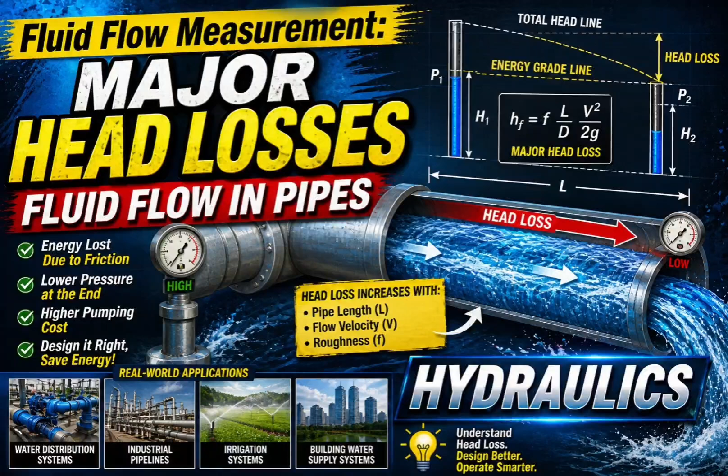Okay, so for today we're going to talk about head losses in pipe flow. Head losses may be classified into two: the major head losses, which are caused by pipe friction along straight sections of the pipe of uniform diameter and uniform roughness, and the minor head loss, which is caused by changes in velocity or direction of flow and are commonly expressed in terms of kinetic energy.

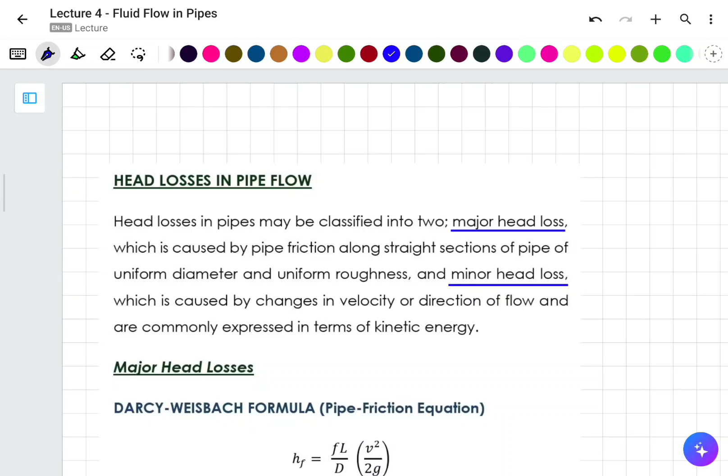So let's start by discussing major head losses. We have different formulas or ways to calculate the major head losses. First, we have the Darcy-Weisbach formula, commonly known as the pipe friction equation. What you see here are three formulas, but the first one is the general formula, the general equation for the pipe friction equation.

If the section of the pipe is circular in nature, we substitute the v squared over 2g with this equation, which is why we have 8Q squared over pi squared gD to the fourth. This equation, which I'll box in purple, is the equation for circular pipes.

And the simplified equation for that is this one: 0.0826 FLQ squared over D raised to 5. But again, we have to consider other pipe sections. That's why the formula boxed in red is the general equation for the Darcy-Weisbach formula.

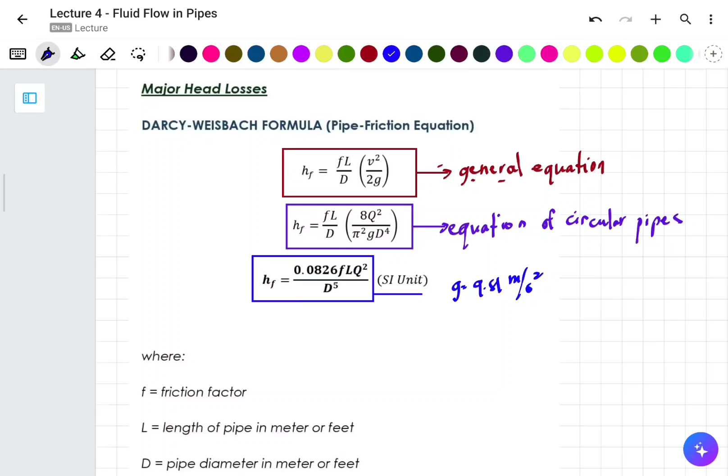So the equation expressed as 0.0826 FLQ squared over D raised to 5 is for SI units, because the G used here is 9.81 meters per second squared. That's why it's in SI. So you are expecting values of L, the length of the pipe, in meters, Q the discharge in cubic meters per second, and D the diameter of the pipe.

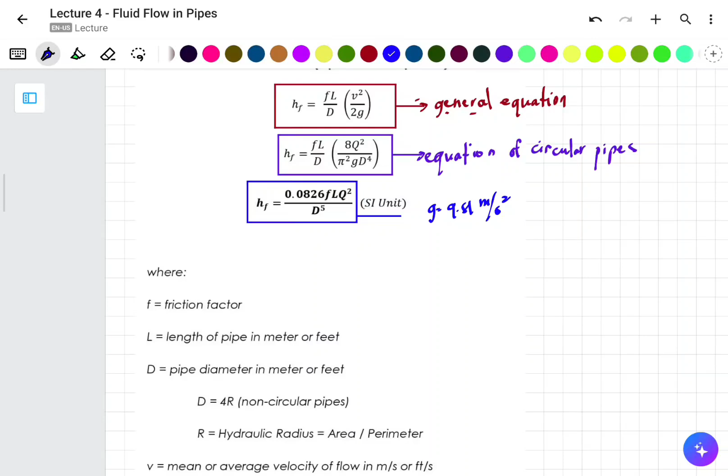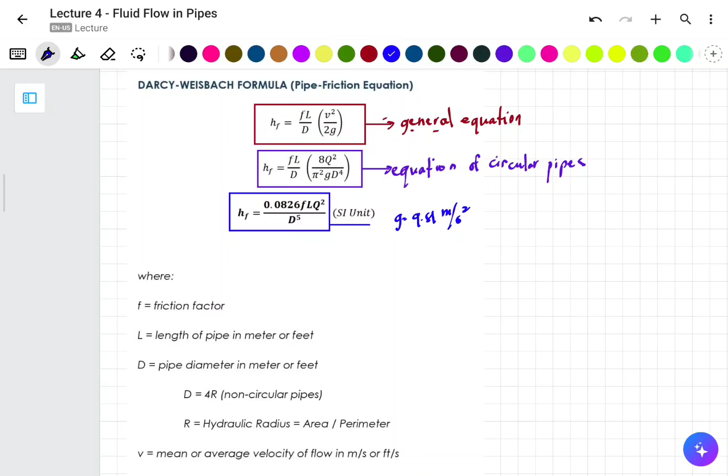Now if the pipe section is not circular, you will use D equals 4R. Again you go back to the general equation of the pipe friction equation, where V is the mean average velocity. If SI unit, we use meters per second, or other units in conjunction with velocity. And Q is the discharge. So this is for the first formula involving friction.

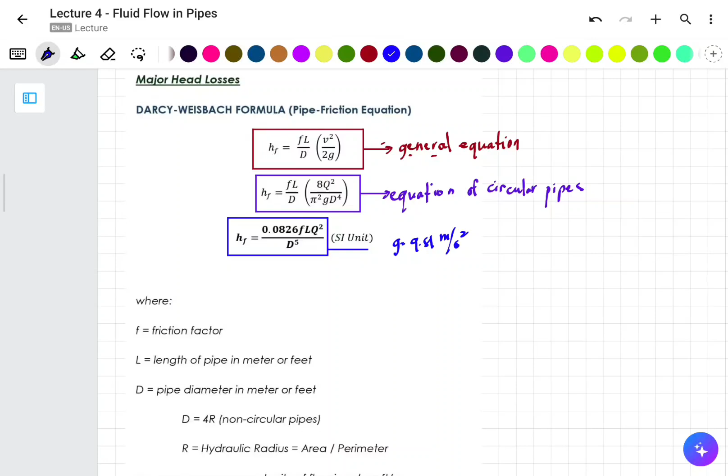Now the value of friction varies depending on the type of flow. If you still remember, we have laminar flow and turbulent flow. So we consider different types of flow, and therefore we could have different values of F, or friction.

So, coefficient of friction: in laminar flow, F is calculated using this formula, that is 64 over Re, or 64 over Reynolds number. If we use the Reynolds number value, if you still remember, Reynolds number is VD rho over mu. So if we use that, since Reynolds number is in the denominator, we interchange the numerator and denominator, and that's the formula that comes out.

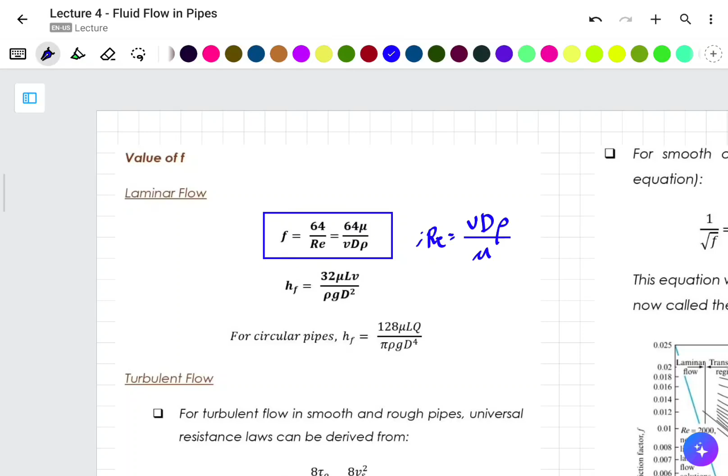Now if we use the formula for HF, the head loss for Darcy-Weisbach, let's go back to this: FL over D, V squared over 2G. So if we substitute our F, it becomes like this. Now the 32 comes out — this is our general formula. Actually these two formulas are general formulas.

However, of course, if your section is not circular, the D will change, but this is the simplified form using the formula of Darcy-Weisbach, that is FL over D multiplied by V squared over 2G. That's how we get the formula 32 mu LV over rho GD squared.

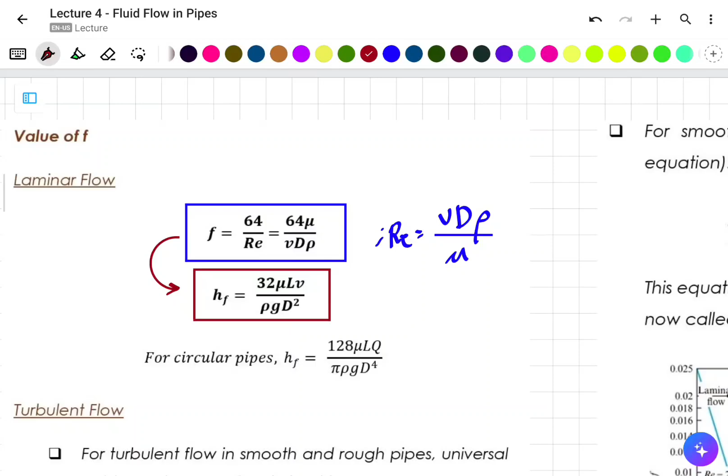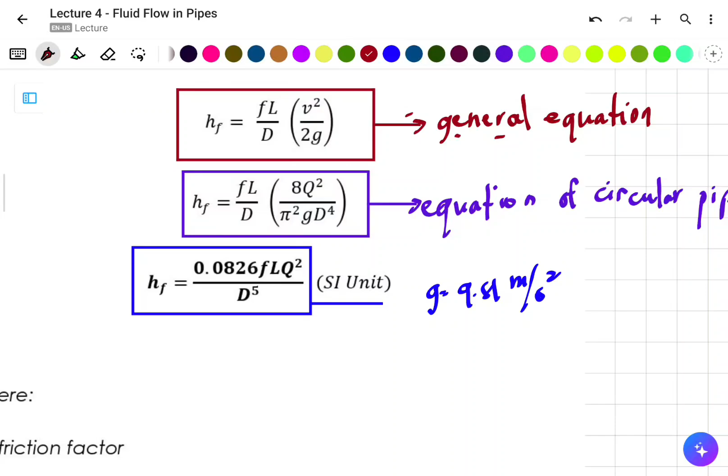Now if our pipe section is circular, that's the F that comes out. So we reduce the values for the circular section, which has the 8, this formula with 8Q squared over pi squared GD to the fourth. So we substitute F there, and that formula becomes this one. Again, this formula only applies when the pipe section is circular. You can go directly there.

128 mu L Q over pi rho g D to the fourth. If you want to simplify further for SI units, use g as 9.81 meters per second squared. If not, that's the general formula for the circular section.

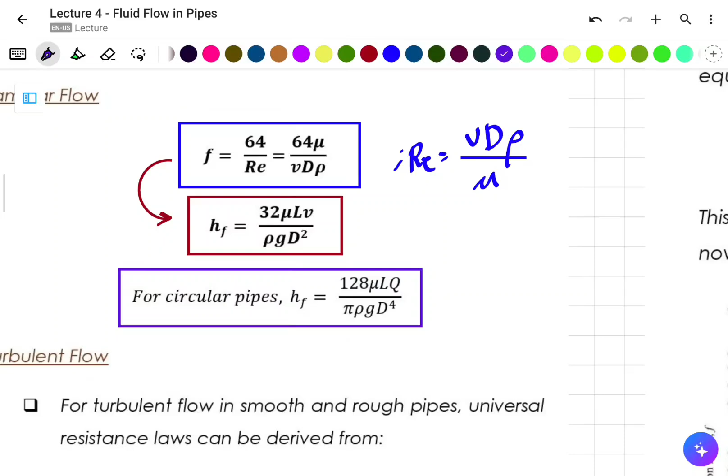Again, circular section only. The two boxed equations above, blue and red, are the two major or general equations for laminar flow for the value of F, or friction factor.

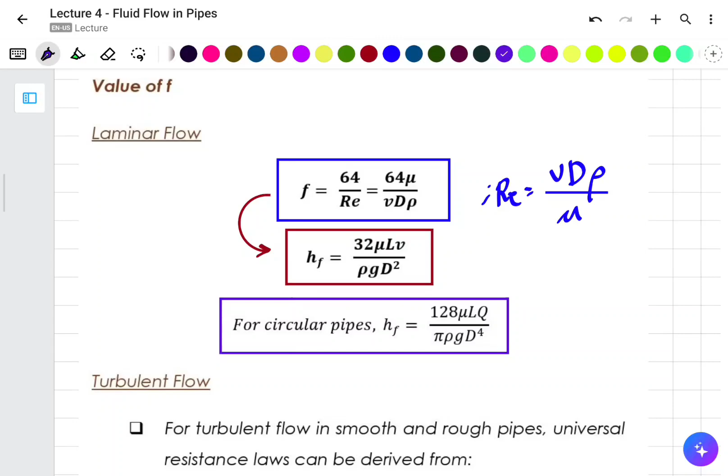Now for turbulent flow, we have different formulas depending on the application of your pipe. First, we have the case when the pipe is smooth or the flow is in smooth and rough pipes. The universal resistance laws can be derived from this formula.

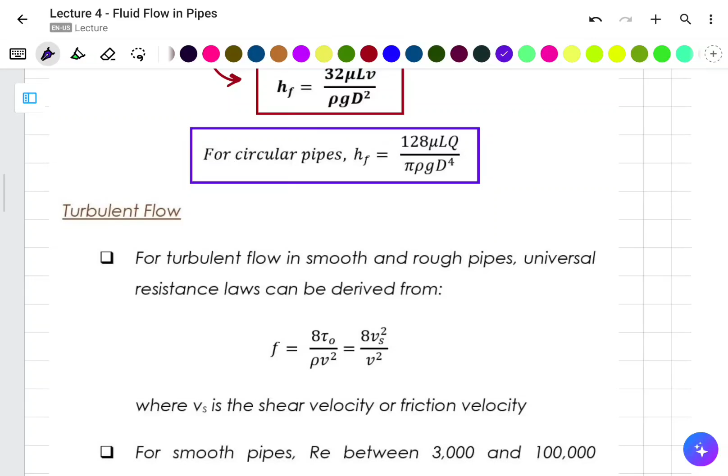So this is 8 tau sub O over rho V squared, or that's the shear, the shear velocity. That is 8 V sub S squared over V squared, or the mean velocity, where V sub S is the shear velocity or friction velocity, which is the square root of tau sub O over rho.

For smooth pipes with Reynolds number between 3,000 to 100,000, proposed by Blasius, the friction factor for turbulent flow is 0.316 over R sub E, Reynolds number, raised to 0.25.

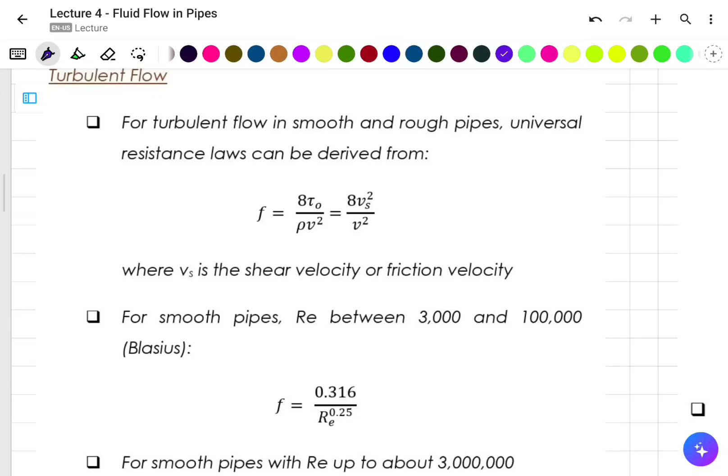Now if we have smooth pipes with Reynolds number higher than 100,000, even up to 3 million, definitely turbulent flow, that is 1 over square root of F is equal to 2 logarithm of R sub E square root of F minus 0.8.

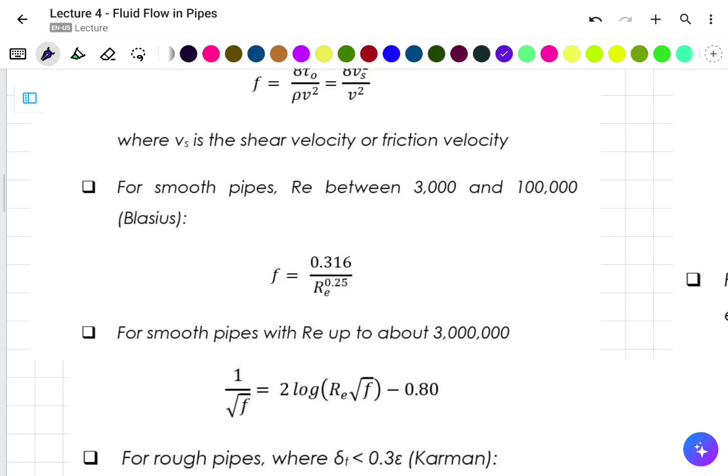Now there's another classification. If your delta sub T is less than or equal to 0.3 epsilon.

That is, the formula 1 over square root of F is equal to 2 logarithm of D over epsilon plus 1.14, where delta T is 11.6 nu over V sub S, the shear velocity. So that's our equation for rough pipes.

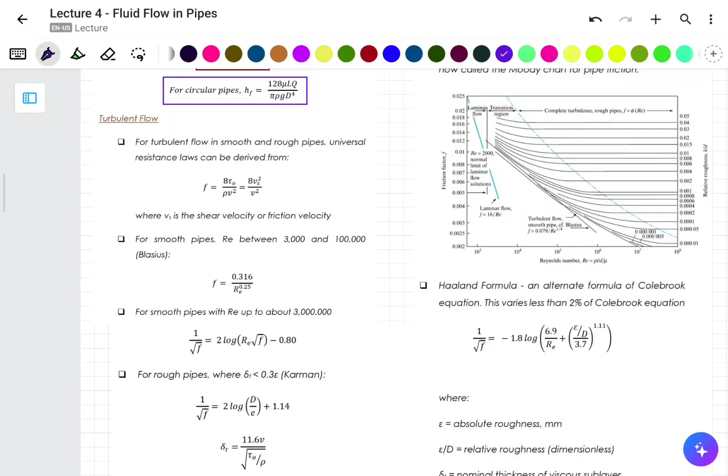Or for pipes where the delta T is lower, that's where epsilon is given, also called roughness, or absolute roughness. This epsilon is called absolute roughness.

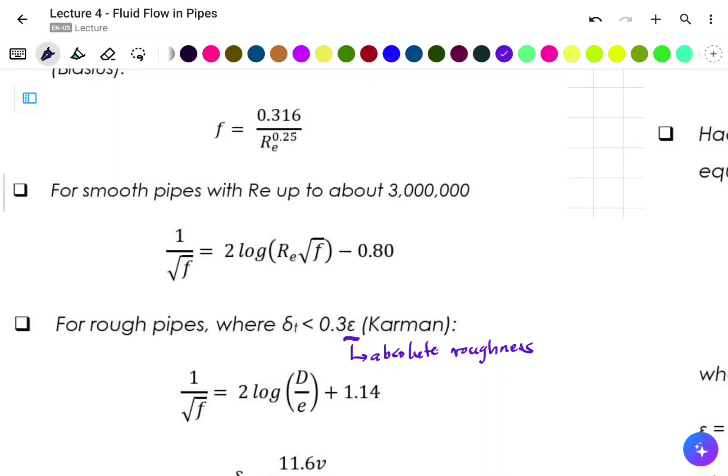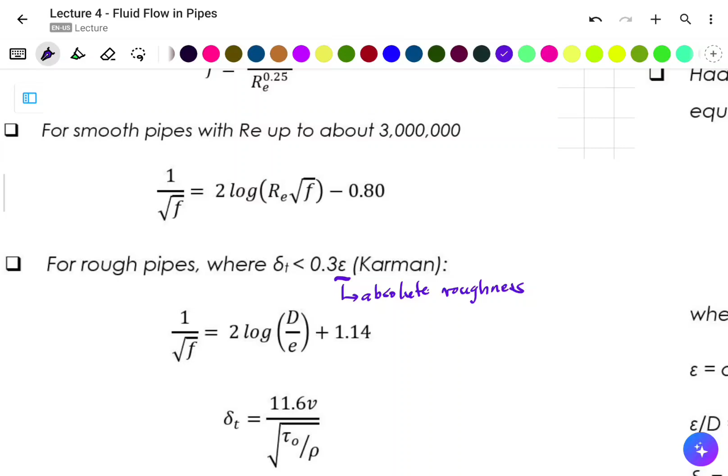Next we also have the Colebrook equation, which is for smooth and rough pipes with turbulent flow. 1 over square root of F is equal to negative 2 logarithm of epsilon over D over 3.7 plus 2.51 over R sub E square root of F.

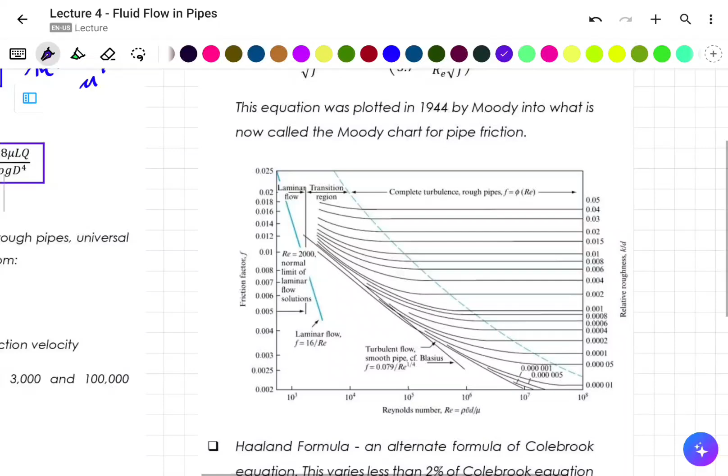Here we see the Moody chart. We can see the transition region, if you still remember transition flow. Then it's laminar flow, then it becomes turbulent, your equation becomes turbulent.

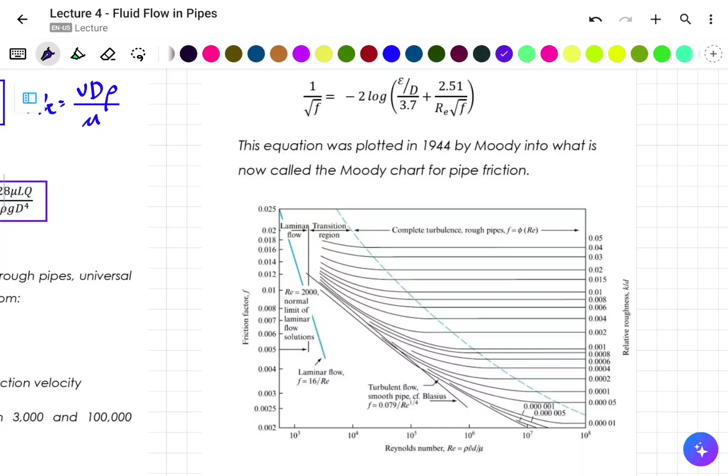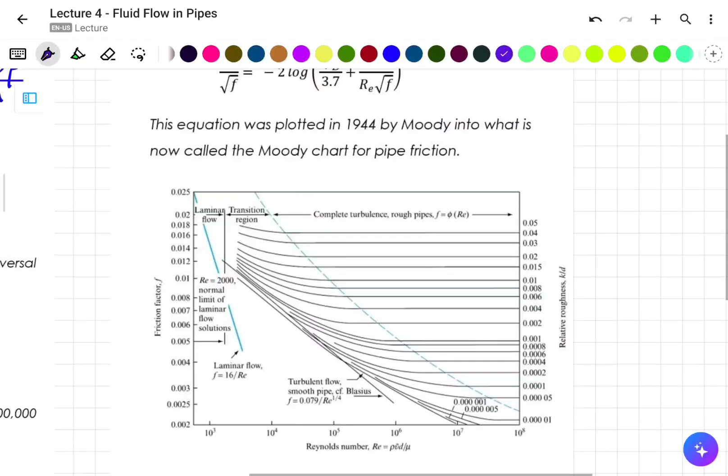This was plotted by Moody. This equation by Colebrook was plotted by Moody. But again, these values are in logarithmic scale, so we can actually compute it, but the solution becomes iterative since the value is logarithmic.

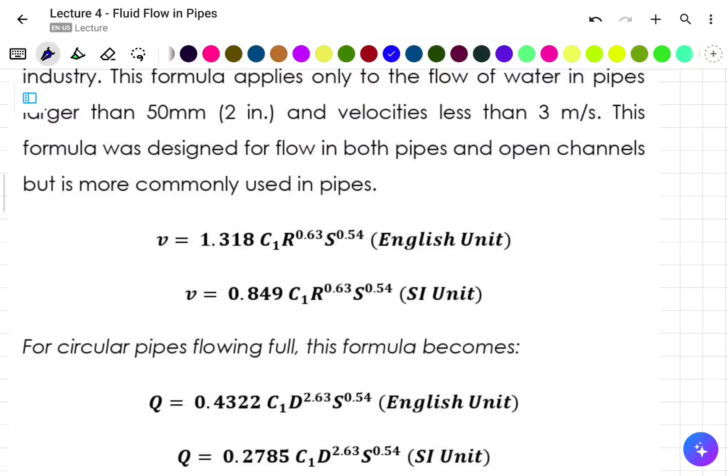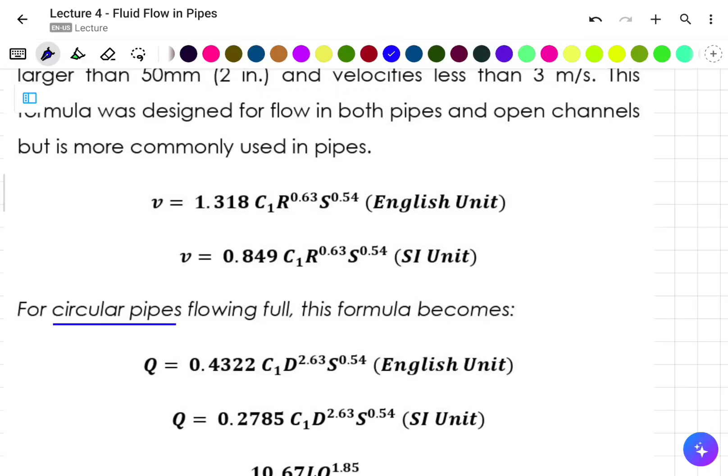So, we're given the Hazen-Williams coefficient. You have to observe also that it needs to meet the requirements of having a larger diameter, which is larger than 50 mm, and slower velocity. Usually around 0 point something. That's the velocity because the pipe is already too large.

So, here are the formulas. When it's Hazen-Williams, there's C sub 1, which is the coefficient. When our discharge is in English units, it's this one, and this is our discharge in SI. Given is the Hazen-Williams coefficient, diameter, and S, which is what we call the slope of the energy grade line, which is H sub F over L, or slope of the EGL.

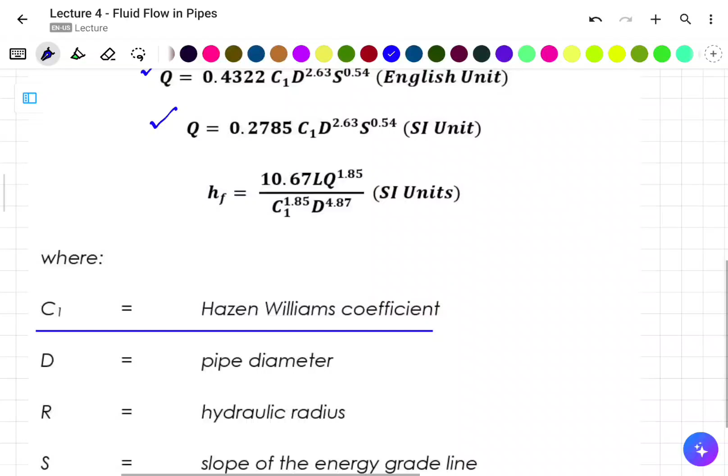10.67 LQ raised to 1.85 over C sub 1 raised to 1.85, D raised to 4.87. So it looks similar to Manning's, right? They look alike, just the variables differ. It's similar to Manning's, it depends on the classification of pipes.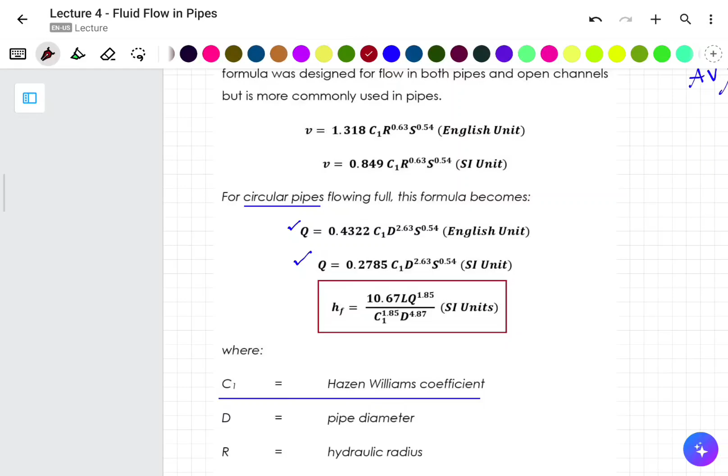That's where the value of C sub 1 goes. Usually, the values of C sub 1 are greater than 100. And on the other hand, N, which we mentioned earlier as the roughness coefficient for Manning, is usually around 0 point something. So imagine, the values are different - because earlier N was the numerator, here C sub 1 is the denominator.

So depending on the given values, we can determine the head loss. C sub 1 usually ranges from, let's say, 100. There's also as low as 80. When it's 80, that's a bad condition - when your C sub 1 is around 80, that's a poor condition, and usually those are cast iron pipes.

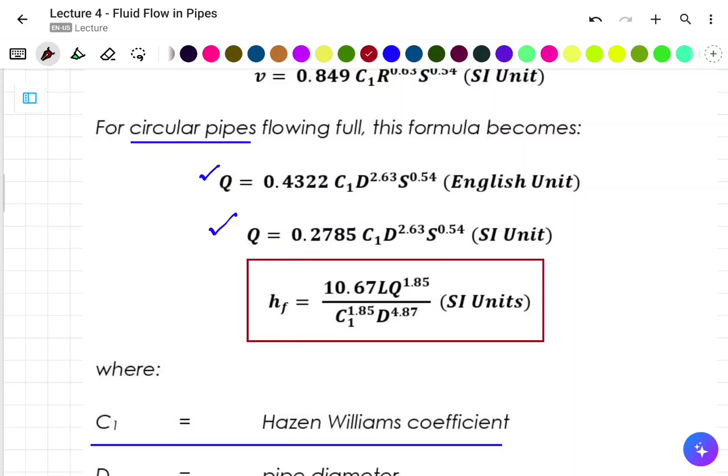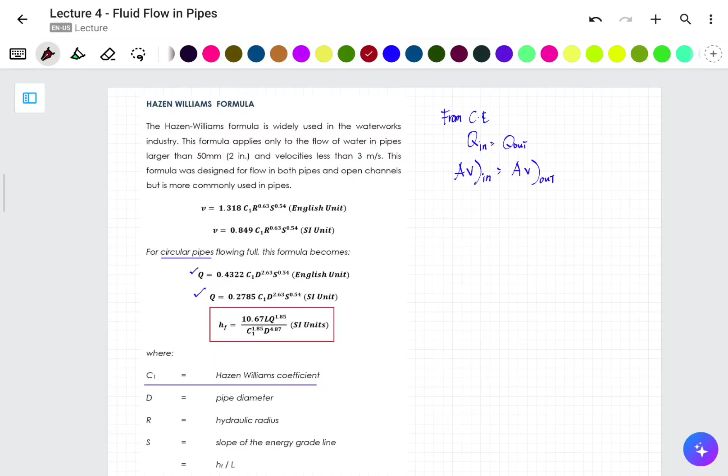Okay, let's simplify our formulas. And those are the formulas for the major head losses. So, to summarize our equation - this summary is for circular pipes. For circular pipes, we have 3 major formulas.

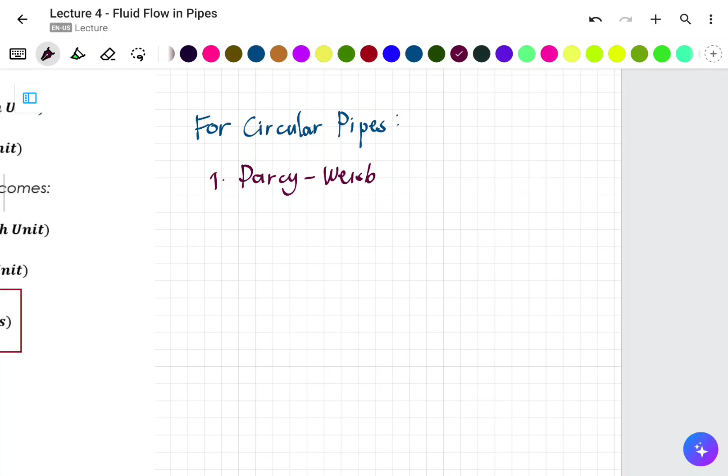First, we have the Darcy-Weisbach equation. So that is, H of F is 0.0826 FL Q squared over D - what was it again? For Darcy-Weisbach, FLQ squared over D raised to 5. Again, this is only for circular pipes.

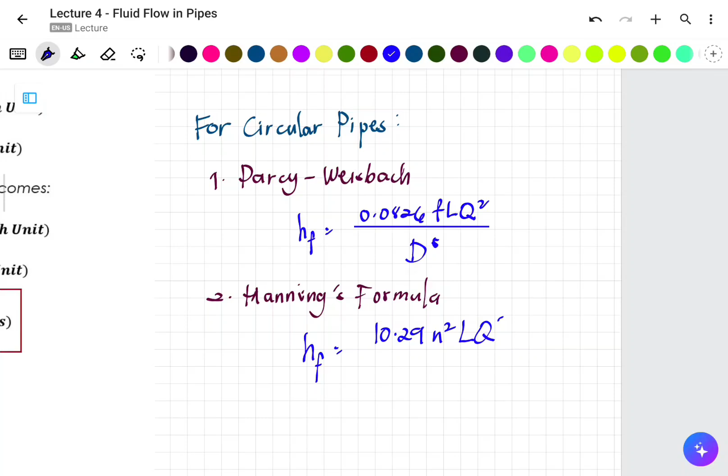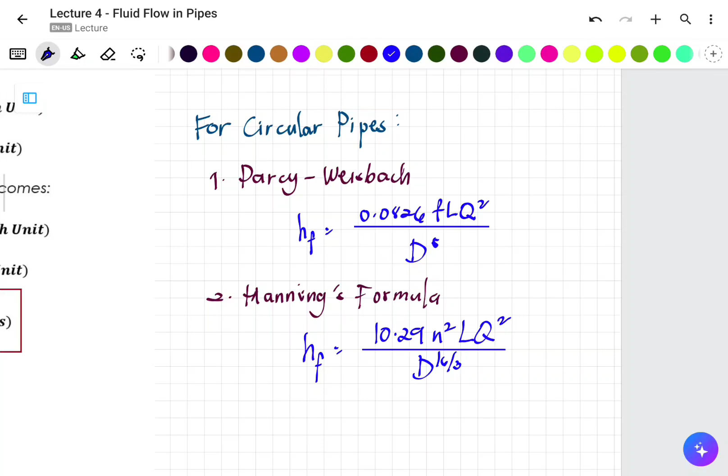Next, we have Manning's formula. Manning's and Hazen-Williams look alike - they appear similar. Because according to Manning, H of F is 10.29 N squared LQ squared over D raised to 16 over 3. That's for Manning. So it's a bit far from Darcy-Weisbach, quite far actually.

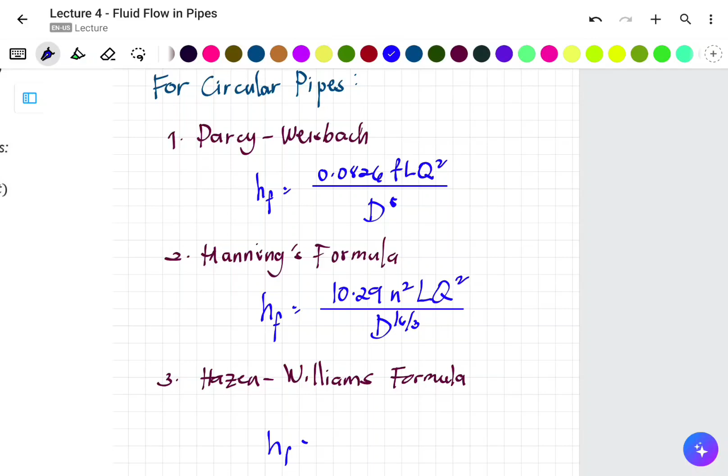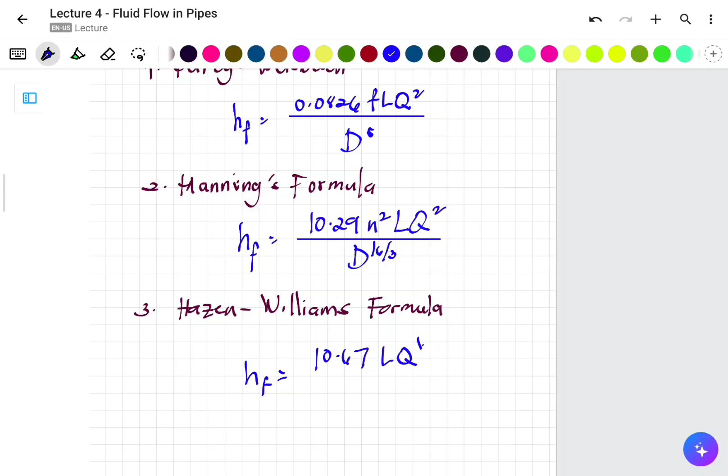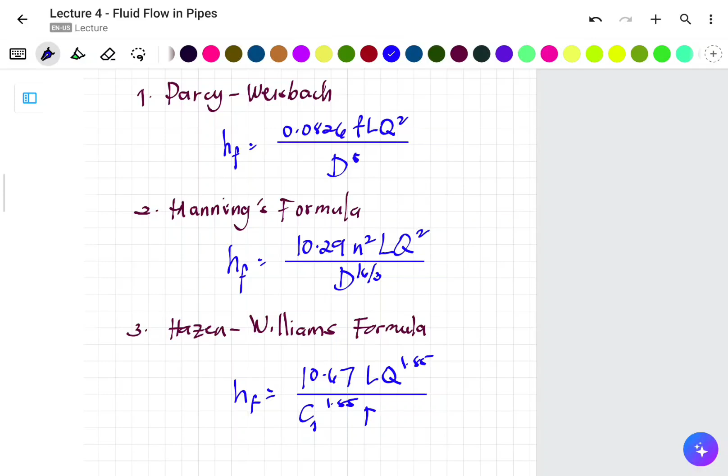And then for Hazen-Williams - there are two that are similar. Hazen-Williams is like Manning's. The Hazen-Williams formula or equation, our H of F is equal to 10.67, which we mentioned earlier, L Q raised to, not 2, but 1.85, over - because you didn't use a coefficient up top, you have it at the bottom - C sub 1 raised to 1.85 as well, and D raised to 4.87.

So, this covers the 3 equations. Again, these 3 equations are only applicable to circular pipes, which is the everyday, or should I say, the commonly used pipe section in our subject. So that's it for the major head losses in the discussion of head losses in pipe flow.